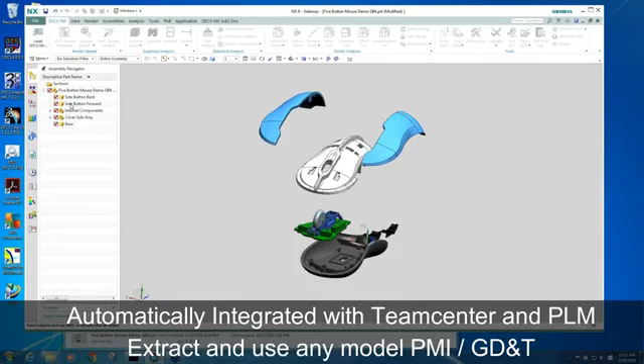So at this moment, you can see you got your NX tree and your NX ribbon up at the top. But with our integrated version, we now have 3DCS NX. Now, for those of you familiar with our software, you'll see all of the common icons that you're used to seeing. We have our own model navigation tree. This model navigation tree has all the information about 3DCS analysis.

So if I start expanding it, you can see the base. This is where we have all the tolerance information. Because we're integrated, when I save this model, I would actually just say File, Save. And I would save it like I'm saving it in NX, and it would save in your Teamcenter.

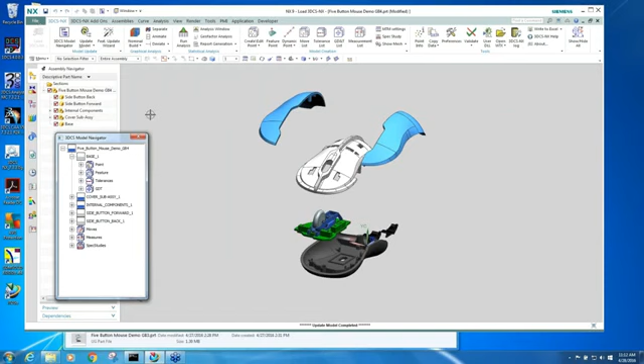Why do we do tolerance analysis? The purpose of tolerance analysis is to understand and validate that if we go into production with our build process and our component part tolerances and our indexing method, we can meet our final dimensional goals.

Those goals can be both quality goals, which would just be the gap and the flushness that you see out here on the outer mouse button, or functional goals, meaning validating that you can always assemble your product. You don't want to go into production and then have a certain number of builds where parts don't fit. All of that gets validated within 3DCS when you're doing your tolerance analysis.

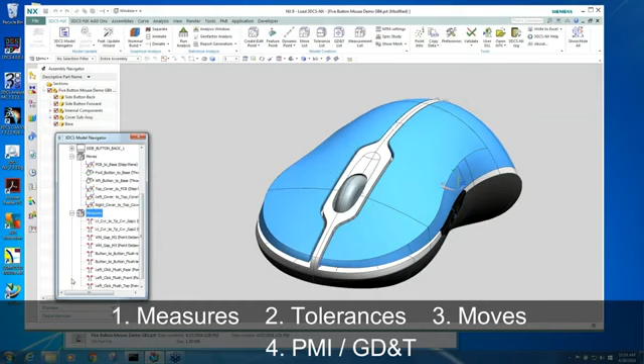There's four main inputs to tolerance analysis: measurements, tolerances, and moves. We normally refer to them as moves, tolerances, and measures, but I started out with measurements because that's the first thing I want to talk about, which is what we want to analyze.

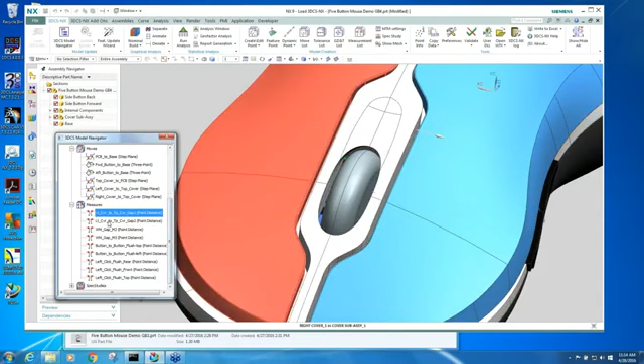If I click over here and I click on this, we're measuring the gap between the mouse button and the center frame. So these are the measurements that are written in the model, and I can click through here and you can see, okay, I'm measuring the gap here.

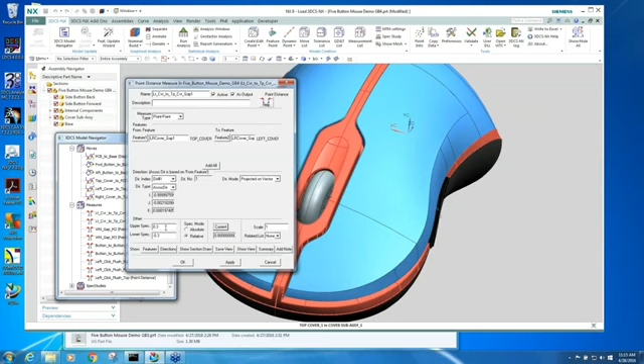If I go into these measurements, okay, so we were measuring this gap, and you can see the nominal gap is 0.8. That's what the design gap is. This is stating what is acceptable variation. So we're saying that gap can vary from 0.8 plus or minus 0.3. So first thing we do is we establish the measurements, which is establishing our goal.

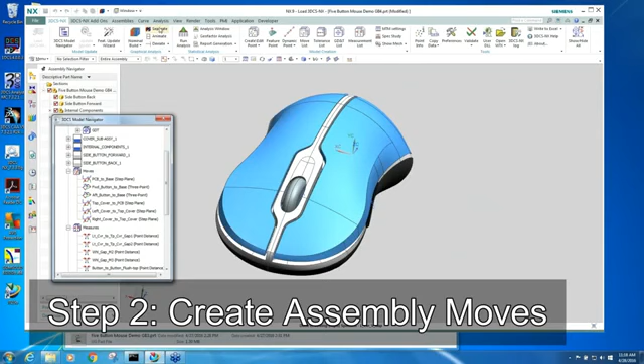So we establish the measurements, which is what we're trying to validate, and then we have to write some moves. So the moves are already written. If I separate this, I can step this through the build process, and you can see it assemble exactly the way we intend to assemble it in production. So the moves are how we define how these components go together. The measures are what we want to analyze.

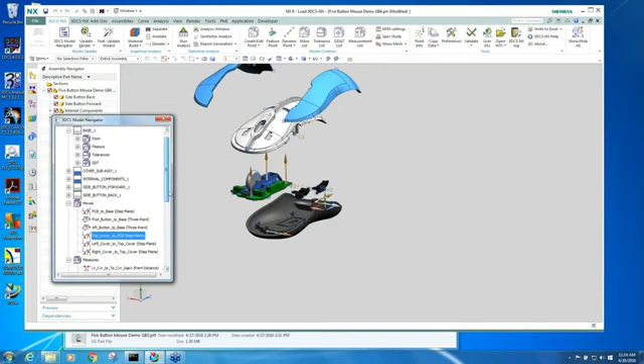And then at the part level, if I go into the base, the part level is where we actually have the tolerances. So now you can see that happens to be one of the features that locates the side mouse button. It's got a location tolerance on it.

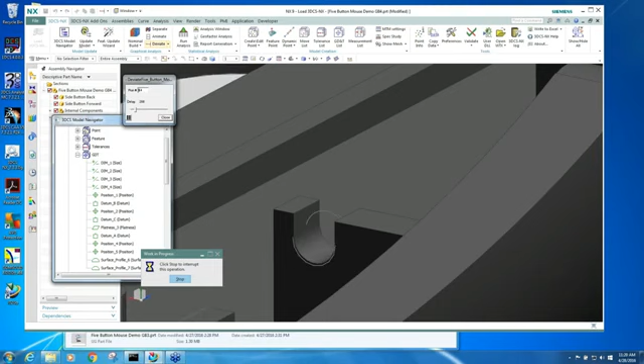And so now when this number is changing because the model is not built, you're seeing component part variation. Every time this number changes, it's like we grabbed another component out of the box, it was molded, and this hole is within its defined positional tolerance. That happens to be the locator for the button.

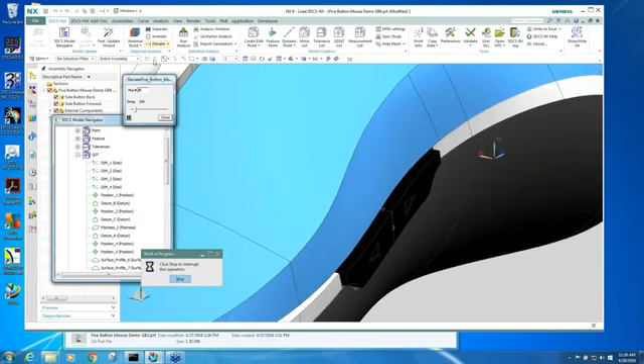So then when I build this and actually utilize all the moves, now when I deviate it, you're actually seeing the effects of the component part tolerance on the location of the button. So if I go to the base, now you can see I'm going up to the NX tree. This down here in the base, this is the 3DCS navigation tree. This base is the NX tree.

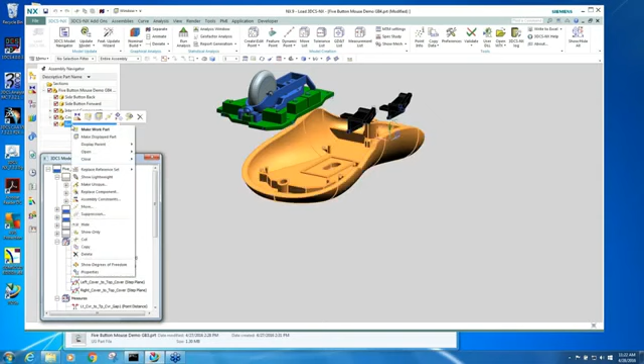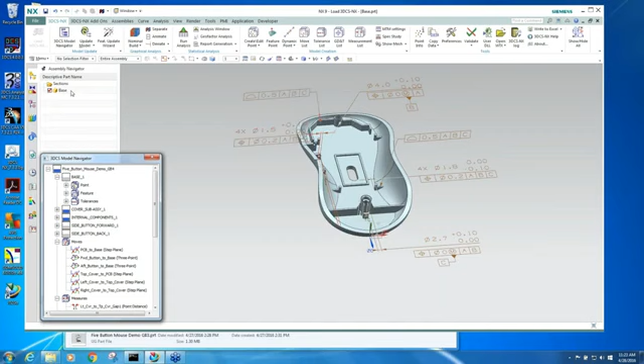If I go into the base and I say make display part, you can see that this base has got embedded PMI. It's got the defined tolerances defined with the actual CAD data. Because this information exists, the process becomes much easier in 3DCS for NX. So you can see that there's no tolerances.

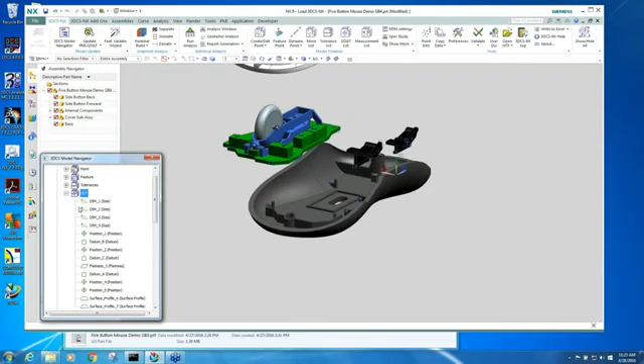Well, these are 3DCS tolerances, but they're all turned off. There's no GD&T in the base. But we saw that there was GD&T actually in the base in the CAD system. So now I can come up here and I can just say update PMI. And I can update the GD&T for the whole model, or I can just pick the base. And when I pick it, you can see that, oh, I all of a sudden have GD&T again. Now my model is complete, and I can actually do a nominal build and run an analysis.

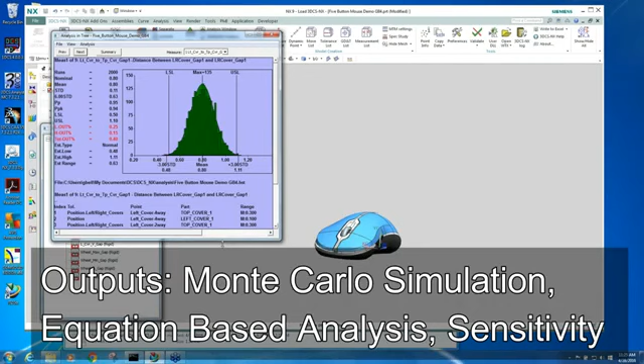I'm going to build 2,000 mouse assemblies, and we get our statistical results. So this is the left cover to top cover gap measurement, and you can see that my range of variation is 0.6 millimeters. And because we said it could vary plus or minus 0.3, we're pretty much there. We're within spec, we're failing 0.4% of the time.

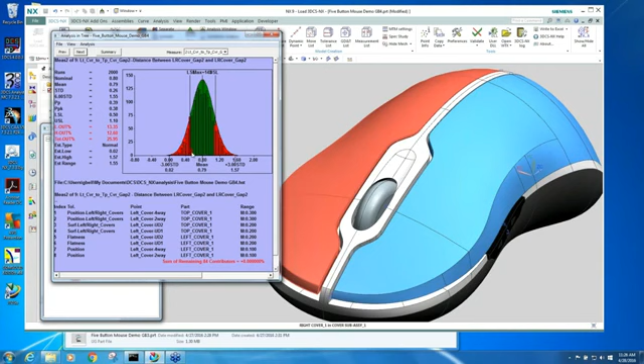However, if I go to the next measurement, which is up here at this tip, you can see that I'm failing a lot more. You can just see that the tips of these are moving around a lot more than what's happening back here. And that happens to be not just a function of tolerances, but it's a function of the move. Because of how we're locating this piece to the top cover, it's getting amplified by 2.64. So that 0.3 millimeter tolerance is acting like a 0.9 millimeter tolerance.

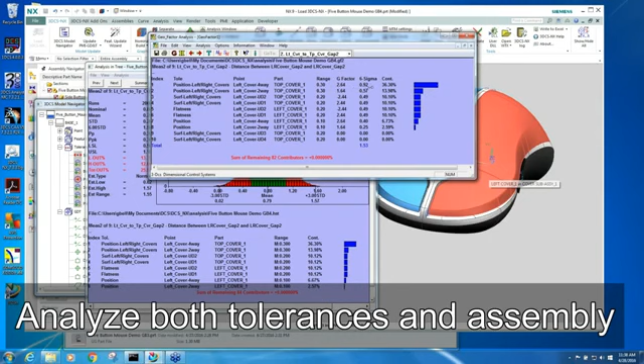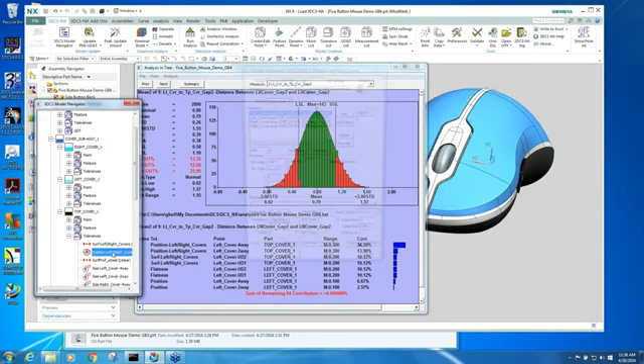So this helps you understand that, hey, it's maybe not just a tolerance problem, it's a location problem, and you should modify your locating method. If you can't, go to this tolerance right here, position left right cover, double click it. I'm going to change that tolerance from 0.3 to 0.15.

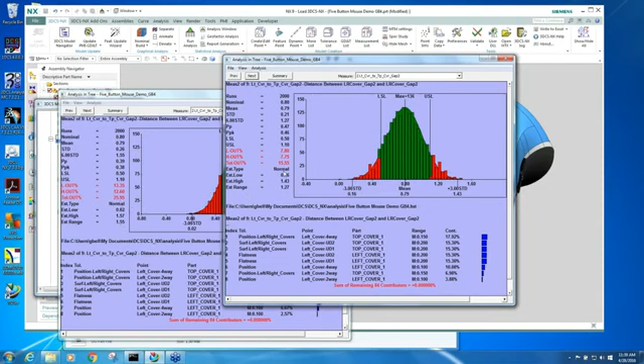Go to the same measurement. So now that tolerance, you can see, man, it's still the #1 problem because it's getting amplified. But you can see it's 0.15 now, and my variation went from 1.55 down to 1.27, failing 26% to failing 10.5%.